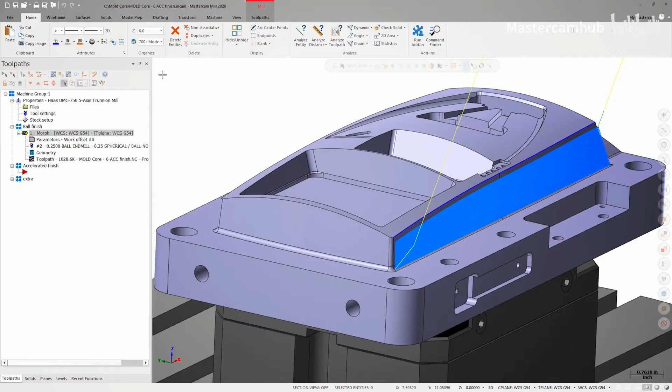Here we have an existing multi-axis morph toolpath that's using a ball end mill to finish this long outside face on a mold core. We'll right-click and drag to create a copy of the toolpath that we can modify with our new tool type.

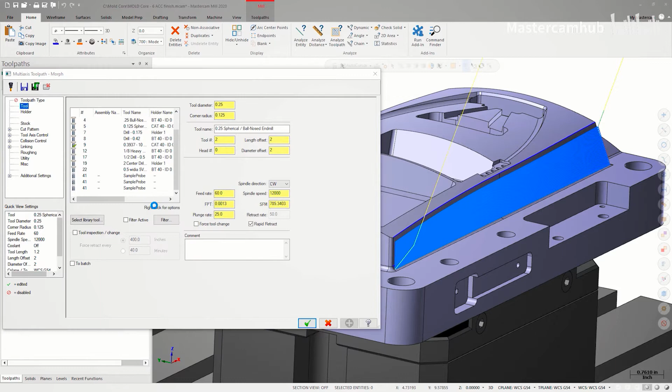On the tool page, in the parameters, we'll right-click and choose to create a new tool. In the Define Tool dialog, we'll see that there is a section for accelerated finishing tools. We can simply select the tool profile we need and then enter the necessary values to define the tool.

Another and more preferable option is to visit the Tech Exchange at mastercam.com. The Tech Exchange contains a number of resources like posts, tool libraries, example files, and more. Once you've logged in with your Mastercam account, click on the Tool Libraries tab. You can then search for specific keywords like circle segment, and the list of tool libraries will be filtered automatically. As we can see, there are several libraries available for circle segment tools, but the one we need is for Emuge.

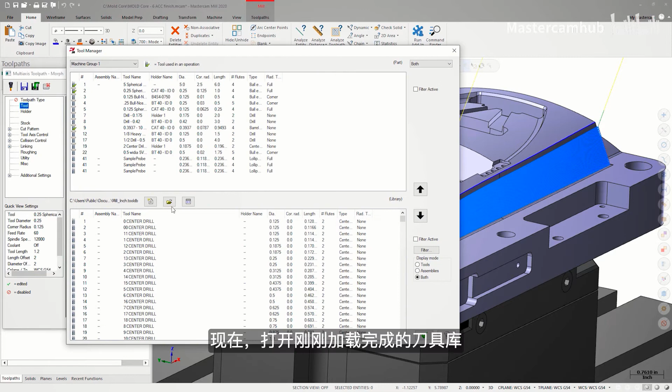Once the library has downloaded, we'll switch back over to Mastercam, and from the tool page in the toolpath parameters, we'll right-click and choose Tool Manager. Let's open the library we just downloaded, locate the oval form tool we need, and transfer that to the part library.

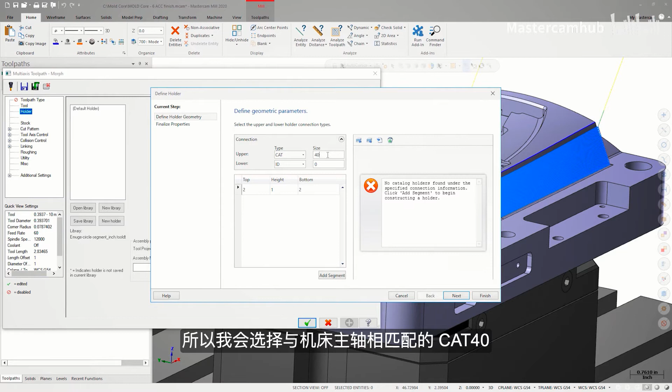Once we've selected the tool on the tool page, let's move over to the holder page. We'll right-click and add a new holder. Because this part is being cut on our UMC 750, we'll choose Cat 40 to match the spindle in the machine. Now let's add and adjust the segments to match the ShrinkFit ER32 holder combo we're using in the machine.

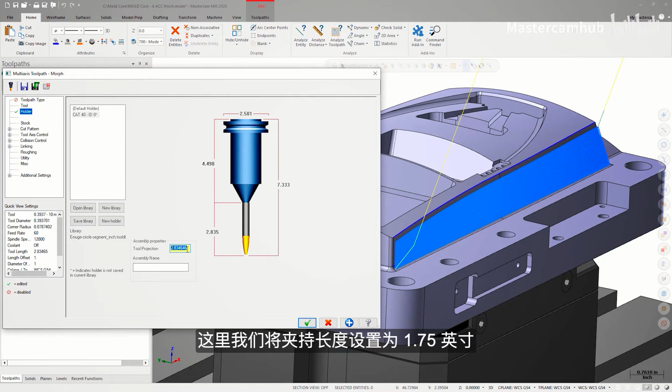Lastly, we need to set the projection length. One way we could do this is by typing in the projection value that physically matches the tool as it's set in the machine. Let's use 1.75 inches. Now we're ready to move to the cut pattern page and begin setting up the rest of this toolpath.

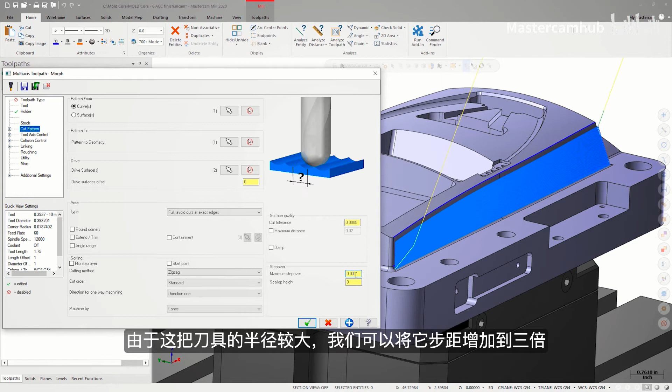Remember, the point of using a circle segment tool is to use the large cutting radius of the tool to minimize the cusps. Because this tool has such a massive radius, we can take our step over value and triple it. Now let's look at the toolpath and backplot.

What we're seeing is that the tool is contacting the part near the small tip radius, which will not improve surface finish over a ball end mill. This tool needs to be tilted so that the larger radius is in contact with the part. One thing you'll notice when programming for an accelerated finishing tool is that unlike a ball end mill, there's a much smaller range of tilt that the tool needs to stay within to be properly engaged with material.

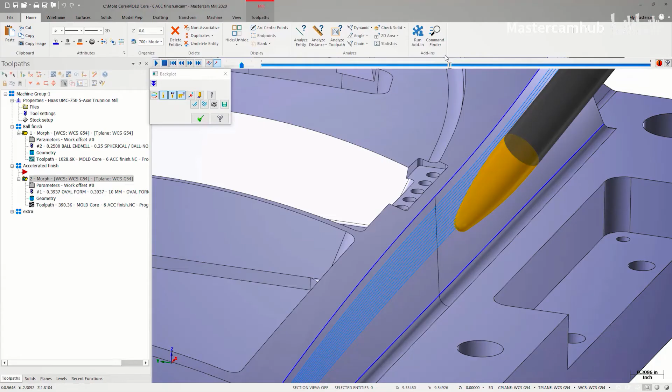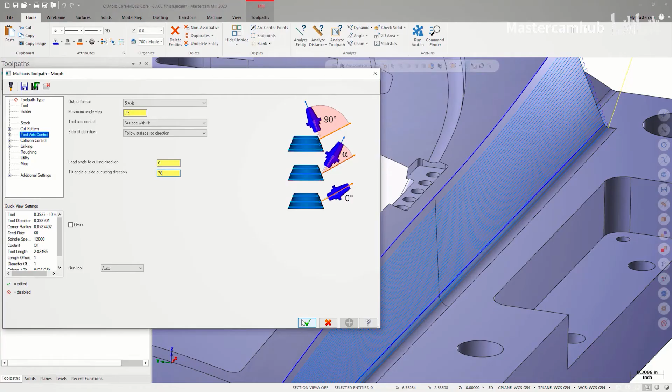Let's go back into the toolpath parameters, and on the tool axis control page, we'll change the side tilt angle from 50 to 78 degrees. Remember, 0 degrees means the tool is normal to the surface at the point of contact, so the larger the value we put in, the further the tool will tilt relative to the surface normal. Let's regenerate the toolpath and take another look at it in Backplot.

Now we can see that the tool is engaged with the material along that large radius. This is going to result in a lower cusp height even with 3 times the step over of the ball end mill. That's going to provide a much better finish with a much shorter cycle time.

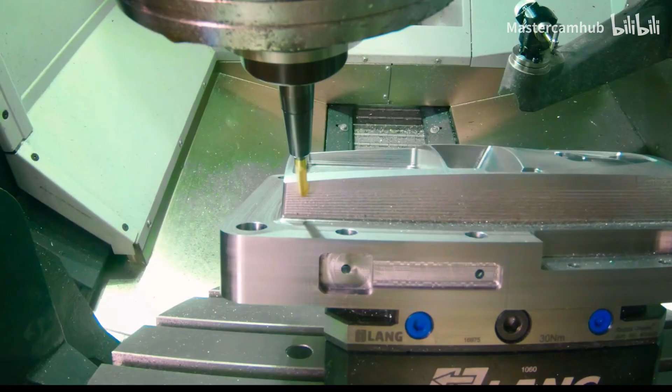After 5 minutes of cutting with the ball end mill, you can see that we are only about a quarter of the way down the surface. The finish looks good, but it's taking a long time to achieve. Now let's run the accelerated finishing toolpath.

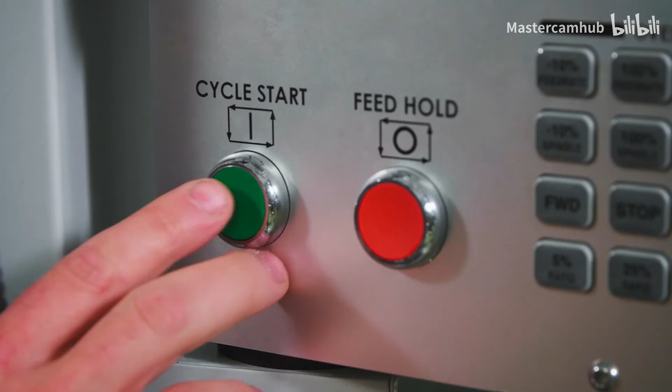Note how responsive the rotaries are and how smooth the motion control is. Having a modern control with good motion control like the Haas NextGen is a key part of what makes these tools shine. The tool has only made a few passes and we're already at the same point that we were with the ball end mill after 5 minutes.

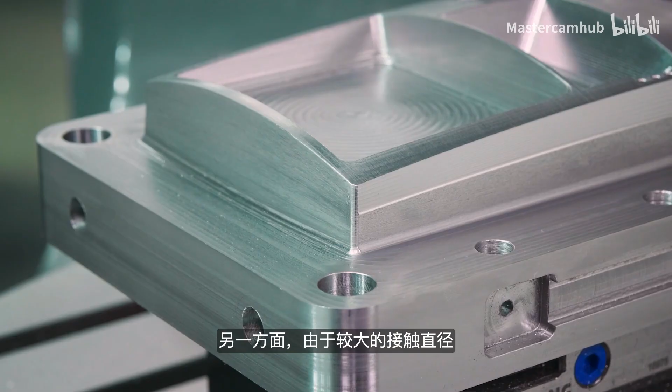While a 2/3 decrease in cycle time is impressive, there's also an increase in surface finish quality as well. Both finishes likely meet the specification for the surface finish on this part, but the ball end mill finish is a little fuzzy and will most likely require some hand polishing to really finish it off. On the other hand, the surface from the accelerated finishing tool is already a mirror finish right out of the machine thanks to the larger contact diameter.

We hope that you've had a chance to see that on the right part and the right surfaces, accelerated finishing with circle segment tools and a high quality motion control like the Haas NextGen can make a massive difference.